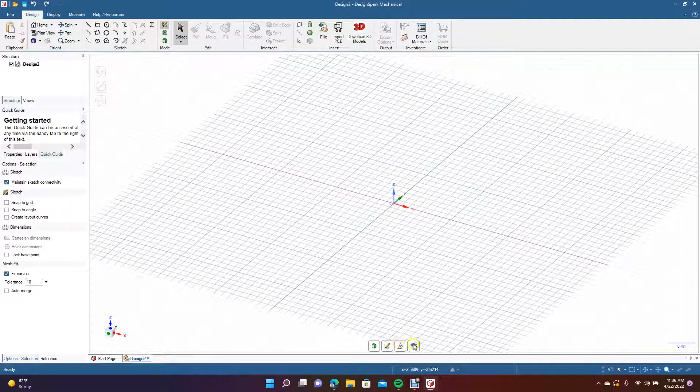We'll come up here to File, do a new design, then click here to change this to Plan View, and make sure that we're in inches. So we'll come down here to Design Spark Options, navigate over to Units, and make sure it's in Imperial as the type and inches as the length. Go ahead and click OK.

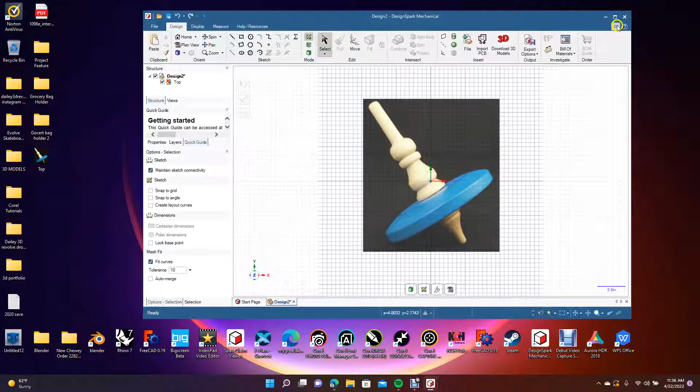I have a drawing that I'm going to use as a basic sketch, but it might not be exactly like this. Go ahead and click on the graphic, go to Move, and rotate on the blue so we have it fairly straight. Now we're going to click and move this over, get the select tool, and put that in the middle there.

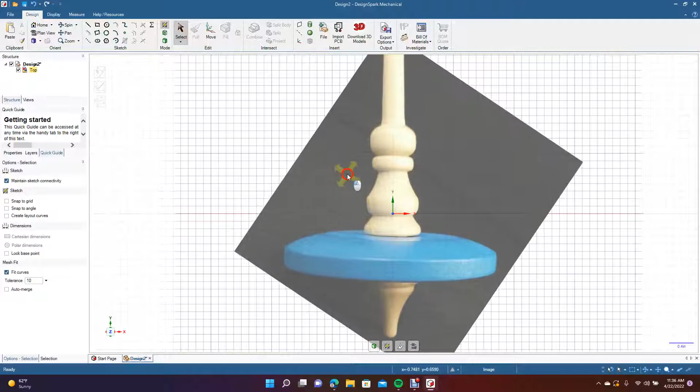Okay, let's go Control minus. Just want to get an idea how tall this is going to be. Don't want it to be too tall. This is about 5 inches.

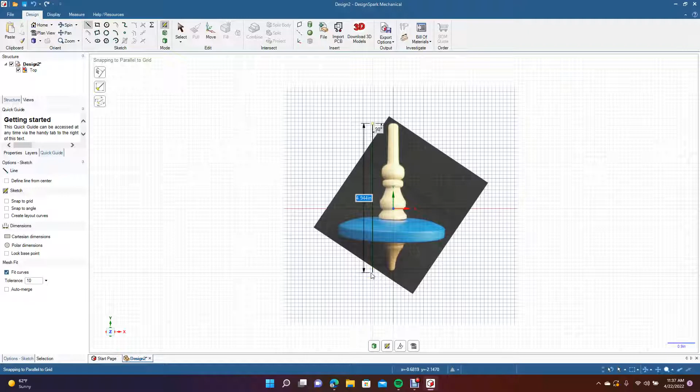Guess that's not too bad. Excuse me, it's kind of a big top, so we're going to make it a little smaller. Go ahead and click on the node there, hold down the Shift key, just drag it down a little bit.

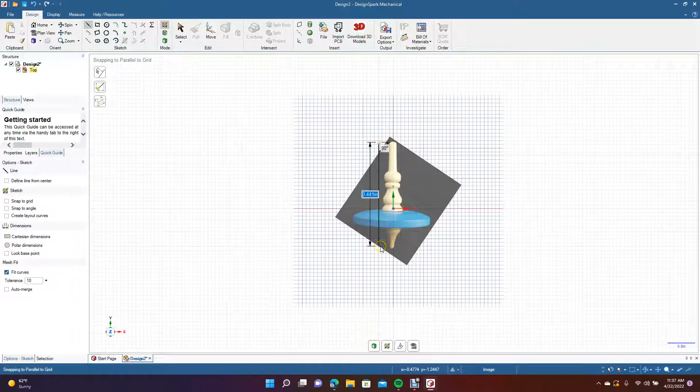Now we'll go ahead and see how big this is. About 3.5, that's going to be good. Okay, so we'll go ahead and use that size. We'll go ahead and Control plus to zoom in.

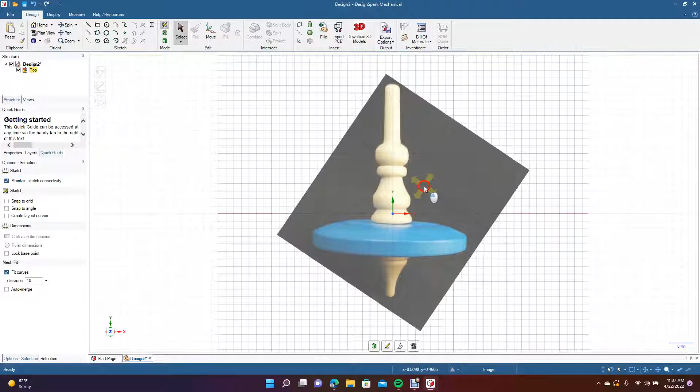We're only going to draw half of this because it's going to get revolved around. So let's go ahead and put that, and we might have to rotate that another time. So go ahead and go to Move. Probably right there, and then we'll just move it over a little bit, get the select tool.

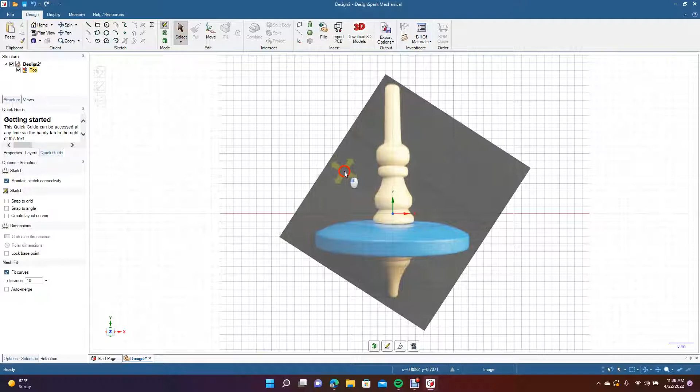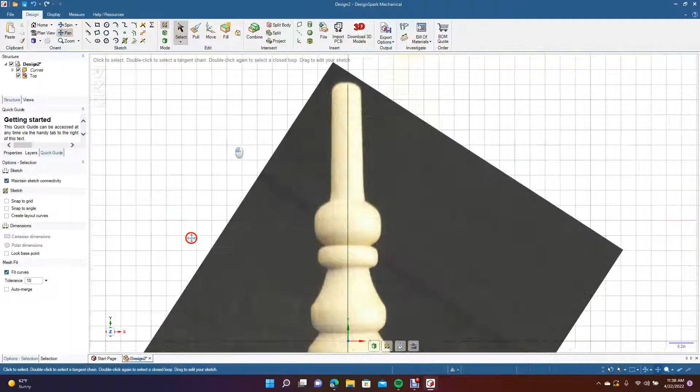Okay, that's good enough. Now we're going to go ahead and get our line tool. We're going to go from the top there, I'm going to type in 3.5. Control plus to zoom in. We're going to get our pan tool, pan down, and we're going to draw this stuff up here.

First thing I want to do is go ahead and get the ellipse tool. I'm going to go ahead and draw this shape here. Okay, now remember, like I said, it doesn't have to be exact, but we are trying to get something close to this.

Okay, I'm going to go ahead and get the rounded corners, create a little corner here. Okay, so this is this part of it right here. Now we're going to go ahead and get the rectangle tool, and then check this box here to define from center, and then click and drag that out.

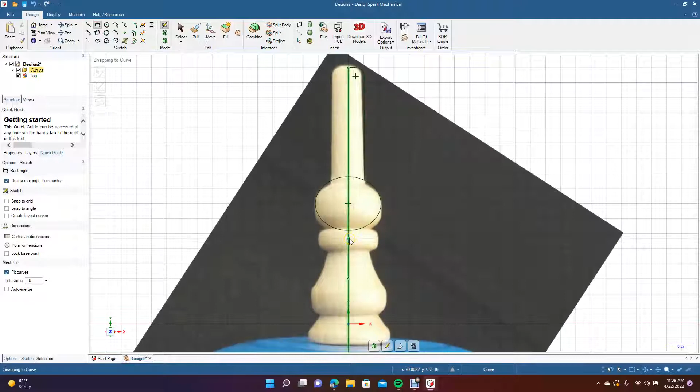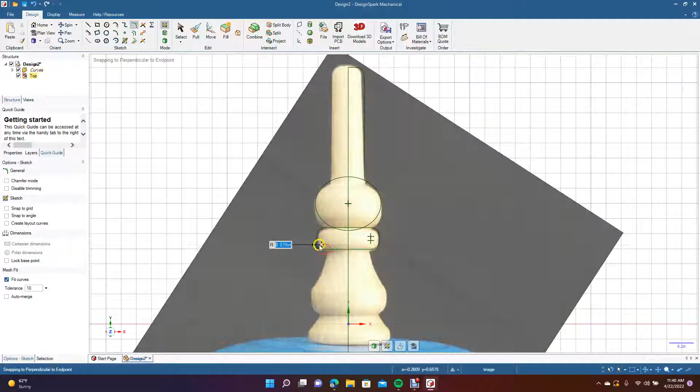And we're going to create this right in here. We'll go ahead and start up here. Actually, let's get the 3-point arc. We'll start there and we'll come down to here. Okay, we'll click there. Now we're going to go ahead and get our line tool.

And we'll come down to here. Go ahead and select the click off. Let's get our 3-point arc. We'll go from the endpoint there to here. Let's curve this in a little bit.

Let's go ahead, Control plus to zoom in. Not real happy with that little piece there, so I'm going to go ahead and redraw that. So let's delete. Delete. I think I'm going to go ahead and use the spline tool. It's a little bit more control under these situations.

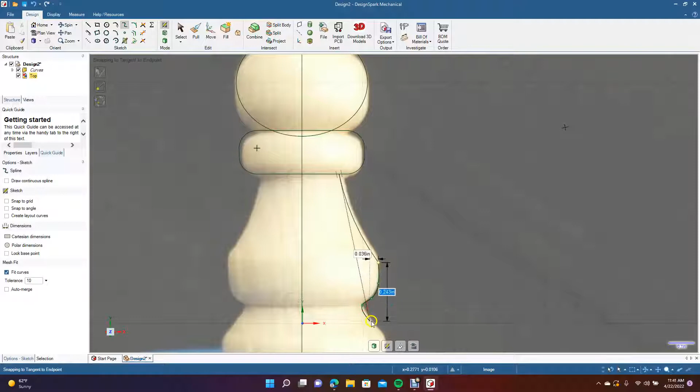Control minus to zoom out. Let's curve that in there. I'm going to go ahead and put this in here. Let's get the 3-point arc. I'm going to go from there to there. And then we'll arch this a little bit.

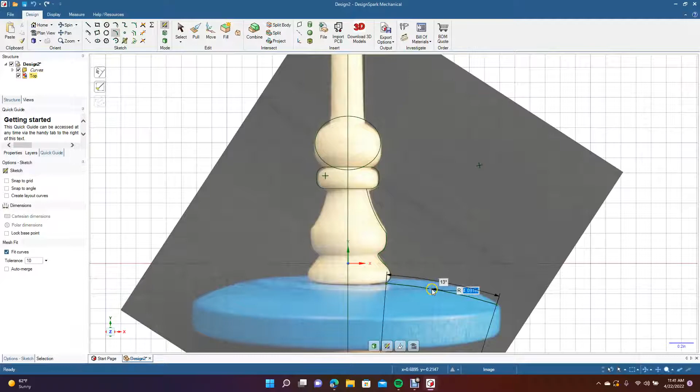Now we're going to get our line tool. We're going to come from here down, and then we're going to come straight over to there. Okay, let's go ahead and pan up.

Probably put a little bit of an arch in here as well. So we're going to get our 3-point arc line. Go from there to there. And then we'll give this a little bit of a... actually, we can't really bow it too much. Let's undo. We're going to go ahead and keep it like this.

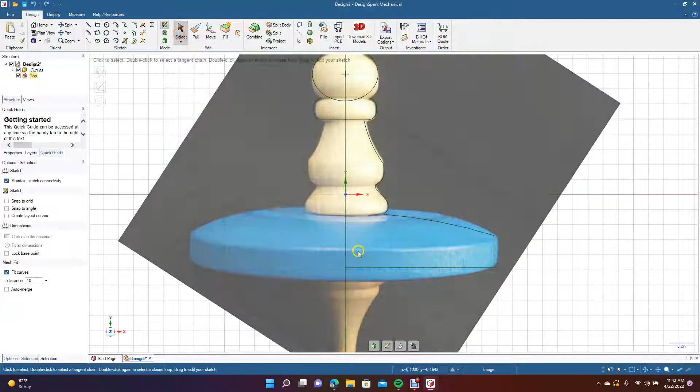Let's go ahead and pan up. Let's draw this piece in here. Go ahead and get a circle tool. Let's get our arc tool, tangent arc. We're going to go from there up to here.

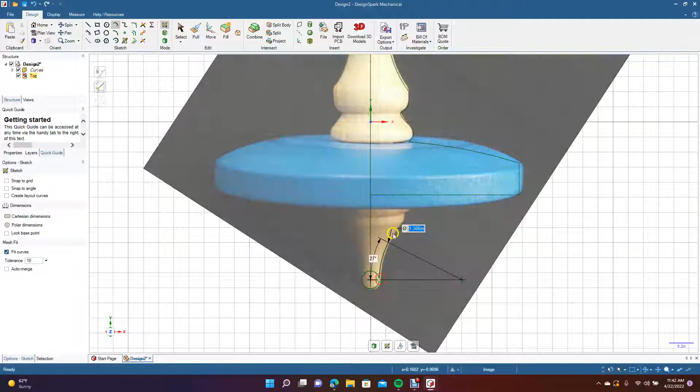Let's go ahead and Control plus, let's zoom in here. Let's get our spline tool. We're going to come from endpoint and just kind of continue this around. Go right to there.

Okay, now you're going to get your 3-point arc. Then you're going to come from that point over there, and then that will be that. Okay, let's go ahead and pan up.

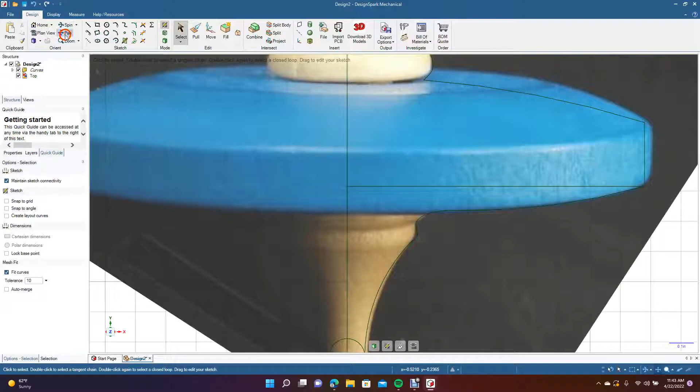Let's get rid of this top. We don't need it, so we'll go ahead and click on it with the select, and we're going to go ahead and get our trim away tool. Okay, let's get rid of that.

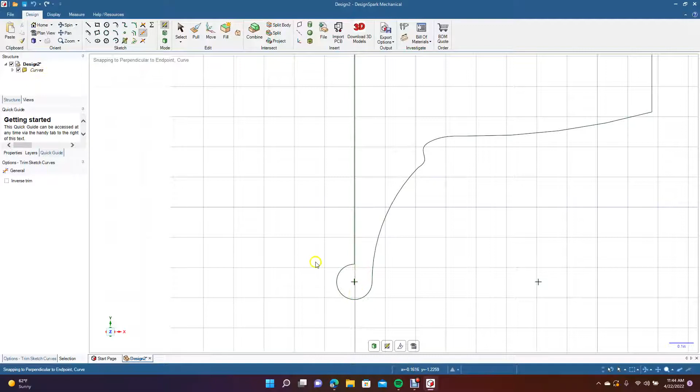Oh, undo. Let's get rid of that piece there, that piece there. Go ahead and pan over.

I'm going to put some fillets in here, so we'll go ahead and do an 0.73. 0.73, we're going to put one here. 0.25, let's pan down, let's go ahead and just continue that with the fillets. 0.151, make that a little bit more round.

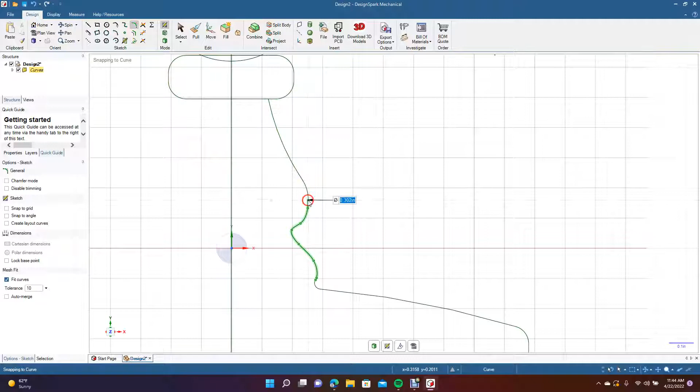Let's round this off. 0.26, let's pan down, let's go ahead and get the trim away tool. Let's get rid of these.

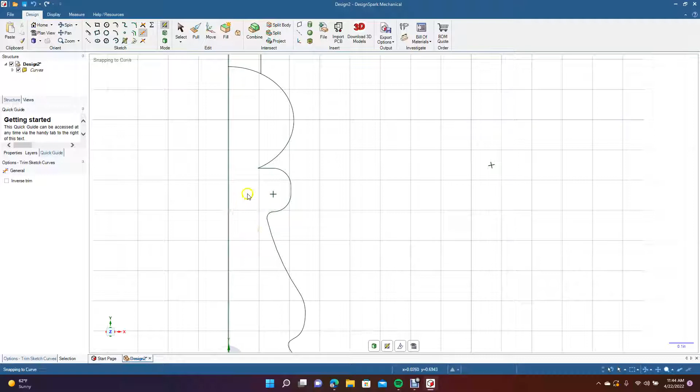Okay, let's go ahead and get a rounded corner in here. Let's go to 0.16. Get the trim away tool. Let's get rid of that. Let's pan down.

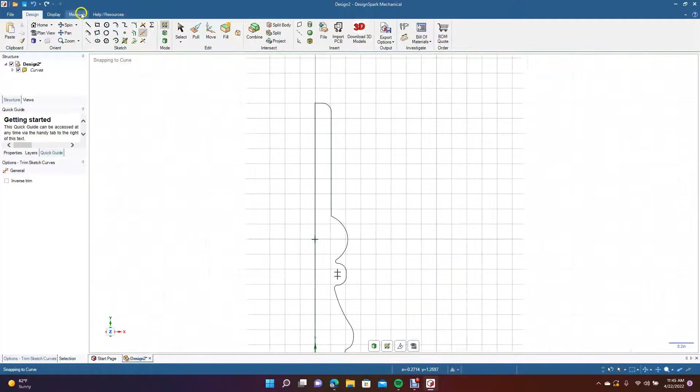Alright, let's go ahead and trim away, get rid of this. Control minus. This is our top right here, our profile. So we're going to go ahead and let's get rid of this line here.

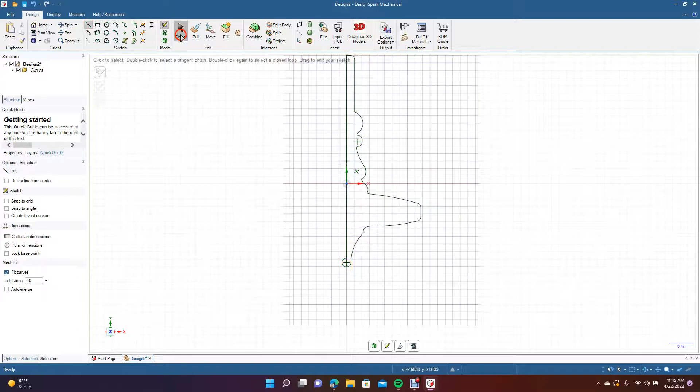We got to put a new one in there. Control minus. Get our line tool. We're going to come from the endpoint there, and then we're going to come all the way down to there. Now we'll get our trim away. Get rid of that.

Now it looks like we're ready to revolve this. Let's put one more fillet in here. Let's go from there to there, then go from here to here. Actually, I'm going to leave that. It's going to be okay like that.

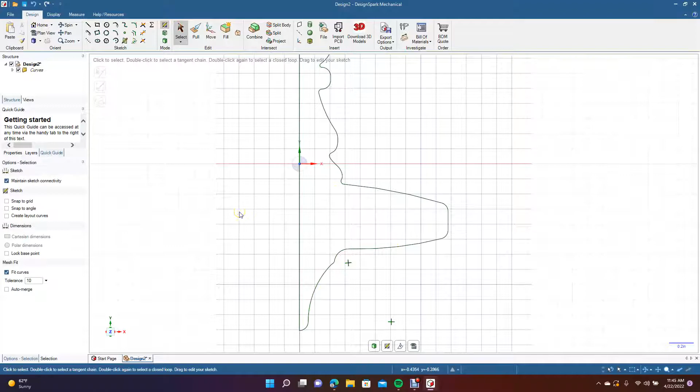Control minus, let's pan down, let's go ahead and get the pull. We're going to go select the half. We're going to come over here to revolve. Click. We're going to pick a spot to revolve from, which is going to be this midpoint. And then we're going to select this full pull.

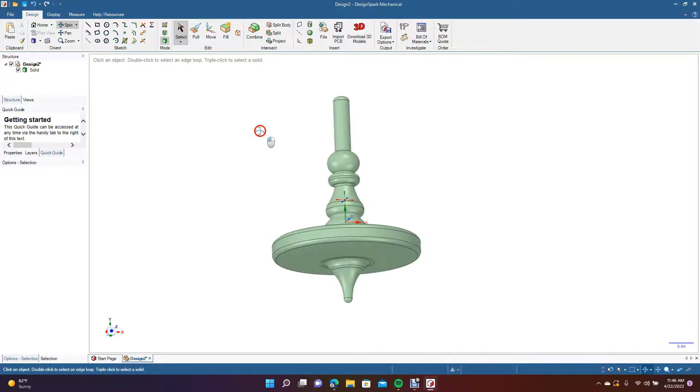Okay, let's go ahead and spin. Make sure this is how we want it to be. Looks pretty good. The only other thing I'd want to do is Control plus to zoom in.

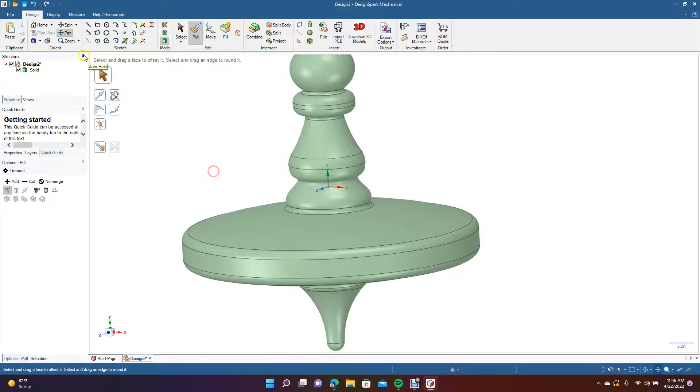Let's pan down. Let's go ahead and put a radius in here, 0.05. Okay, let's just pan up. Make sure we don't need radiuses anywhere else. That looks good. Go ahead and spin that. Okay, I'm satisfied with that.

Go ahead and go to the top view. This is going to end today's tutorial. This is going to be our plastic spinning top. It's approximately 3.5 inches tall by probably a couple of inches wide.